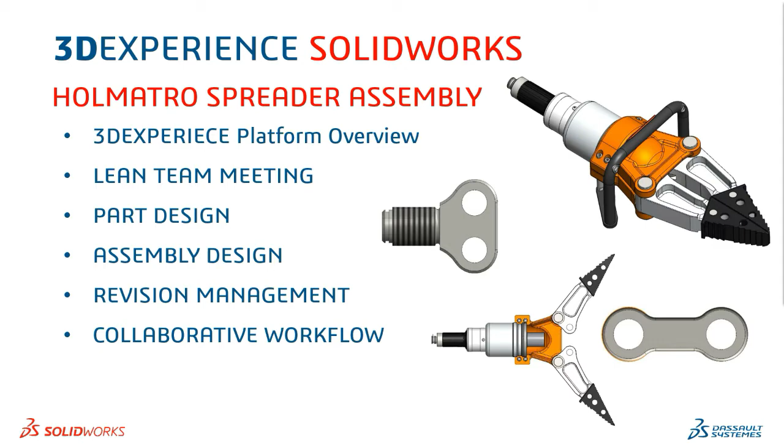So let me just start off with the browser and log in to the platform. I'm in the web browser accessing the 3D Experience platform with my user credentials. Users having credentials will have access to the platform from anywhere, on any device.

So we will see a dashboard with different tabs, widgets, and apps loaded in it. There's a data tab, project, community, and other tabs as well. The dashboard is a fully customizable interface in the 3D Experience platform. We can customize it as per roles, like a managers dashboard, engineers dashboard, or approver dashboard.

So you can see if I switch to the engineers dashboard, I have limited tabs available for access. So we can configure and customize the dashboard as per the roles and requirements.

So users can select the relevant apps and relevant widgets to load in their role within the dashboards.

I'm currently in the HOLMATRO Admin dashboard right now, and let's see the data drive.

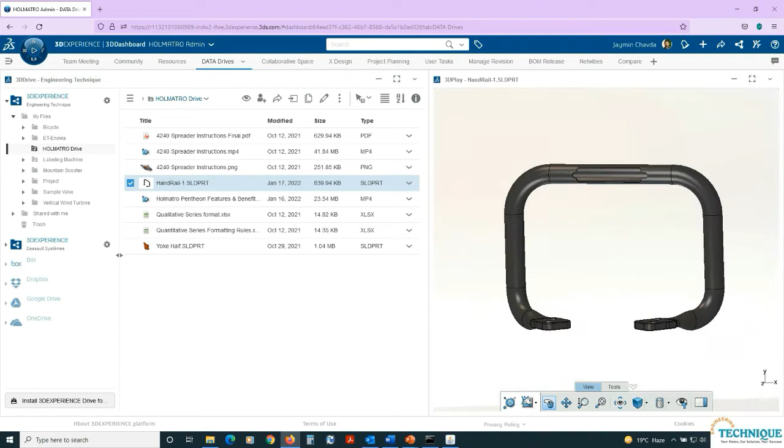So let me just create a new folder over here. You can see the 3D preview of the files. And let us create a folder into the drive.

And just drop some files into it. So the 3D drive provides a secure storage to store any files on the cloud. It's a part of the 3D Experience platform.

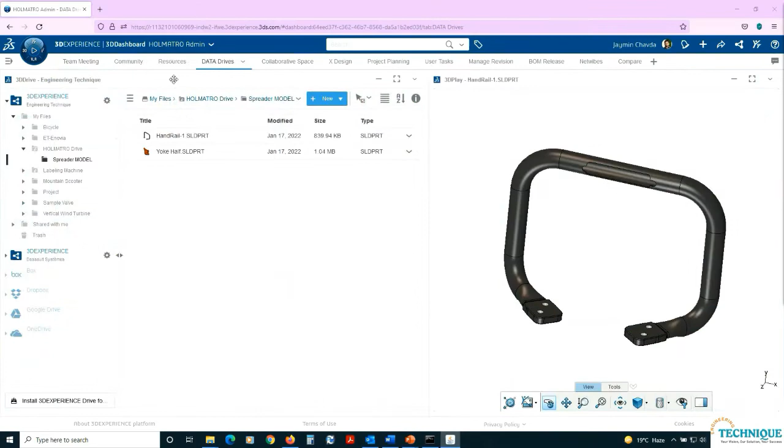Next, in the resource tab, I might want to have access to the SolidWorks blog for the latest updates. So on the left of my screen, in the feed reader, I will get it and it will keep me updated. Next, I have set my SolidWorks web page.

So we can set frequently visited websites, and we can attach data files over here, which can be shown in the form of a bar chart or a pie chart. So all of this is available in the 3D Experience cloud platform.

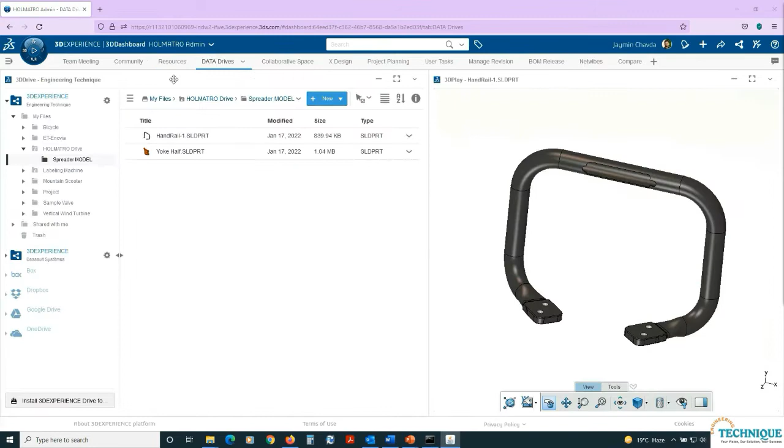Now let's go and create a project folder. In the collaborative space, I'm creating a new project folder named 'HOLMATRO Spreader Design,' giving the same name in the description, setting family to design. I want to store any kind of data over here, and set visibility to private.

So only members of the folder have access to it. We can configure the user access to the project folder. So let me just add Manish and Asutosh, as they are already working on this rescue equipment project.

Now here you can see I have already many other project folders created. So we just need to click on one and we'll have access to the files. You can find 3D models and drawings, and you just need to drag and drop files into the 3D player for the preview.

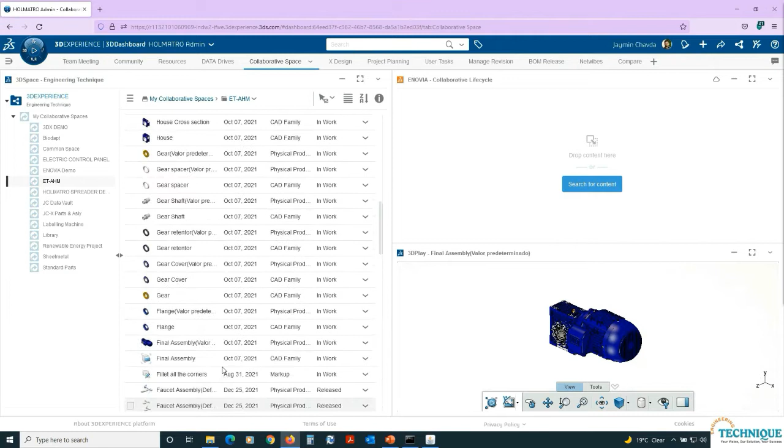I can also drag and drop files into my lifecycle tool, where we can manage the approval processes.

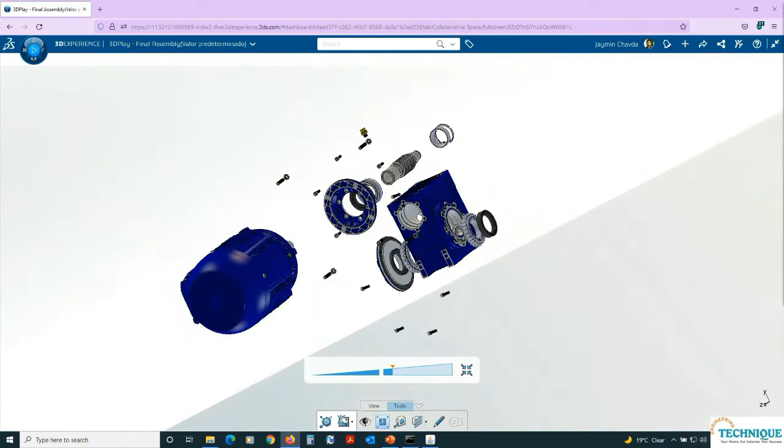So the 3D player is like where you can have a preview of the files. You can have an auto explode view, with auto explode features available for better visibility of internal part details.

We can also cut through the sections of the assembly. So it's just like the eDrawings tool we use in the desktop version, but this is the web-based, cloud-based version of it.

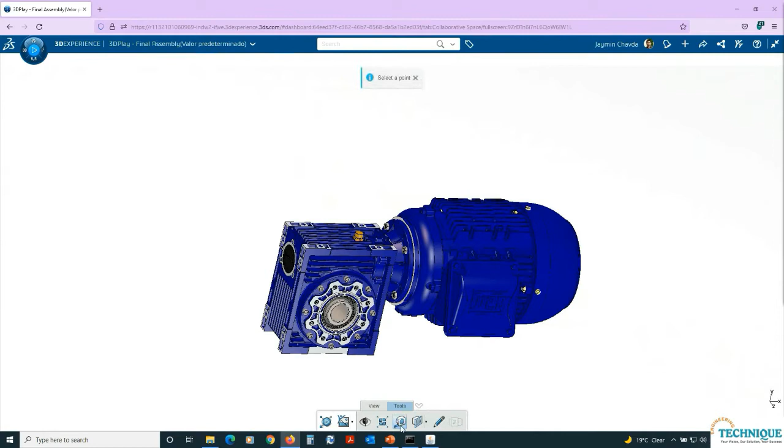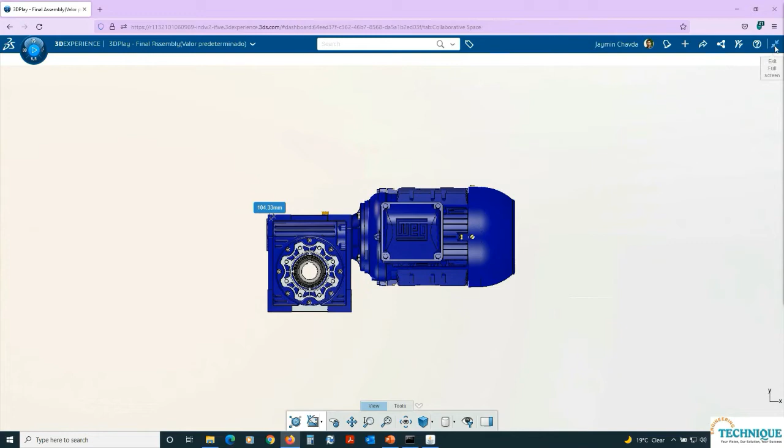There's also a measure tool available for part measuring. It's similar to the functions and features available in eDrawings, now available on the cloud using 3D Play.

Whatever files we save in the collaborative space follow a process workflow. Every file goes through the process - it first comes in work, then goes to release, and accordingly we set the status.

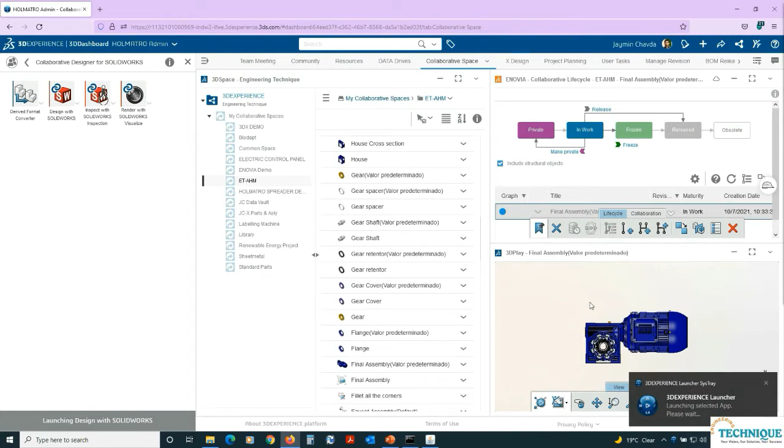Now let me open SolidWorks from the platform to work on the assembly file of the spreader. We're going to work on the spreader assembly - this is a current project on which Manish has already worked, Manish and Ashutosh are working on it.

As we have created a collaborative space for the same, let's open the assembly. It's a rescue tool used by fire departments or emergency service departments. There's a hydraulic actuator and the jaw - those are the functional components of this device.

On the right of the screen, in the 3D Experience add-in, it requires setting the Holmatro Spreader Design at the current collaborative space in my session. So let's set the collaborative space over here.

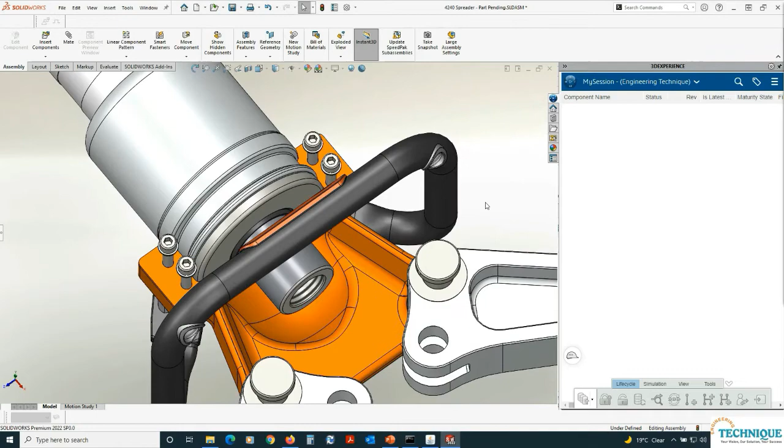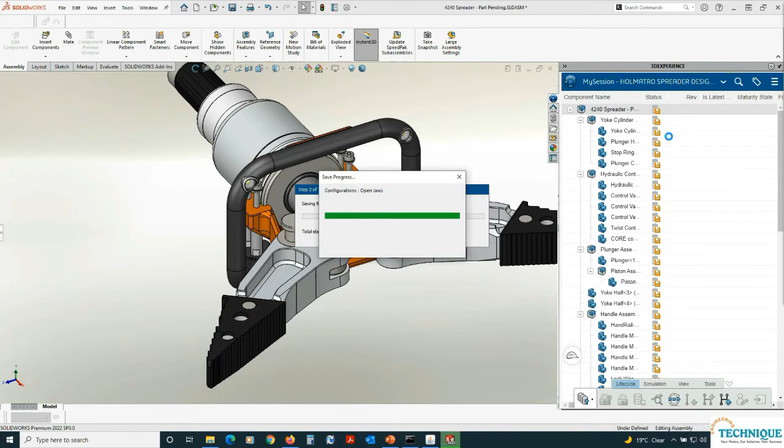You can see it shows the assembly tree having status of files that are not saved in the 3D Experience platform. Let me save all the files on the cloud, which will be uploaded to the Holmatro project folder, showing it is saved to the 3D Experience platform.

It will change the status to 'in work' and the maturity status to revision A1. Let's see how it looks in the browser.

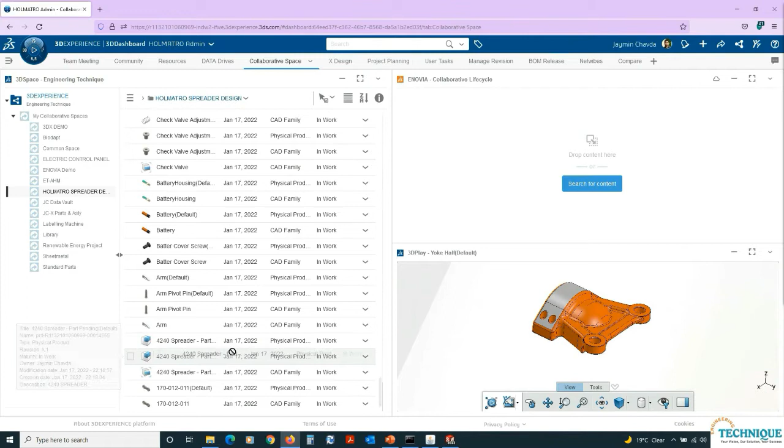You can see in the Holmatro Spreader folder, I will get all the files now uploaded to the cloud. Let's drag and drop files to get a preview of it.

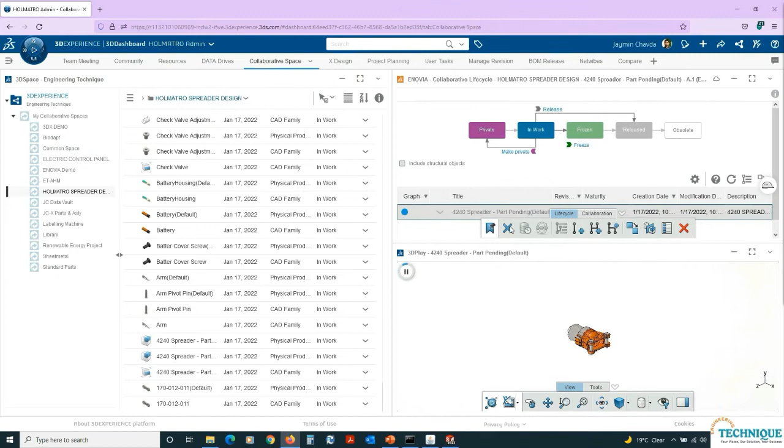Keeping all the references intact, like the assembly, sub-assembly, and part references, it will upload all the files to the cloud.

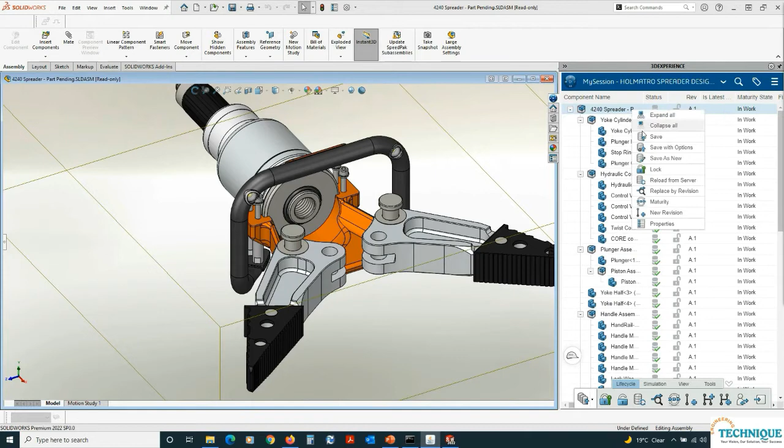Now let us release the assembly. Files in the collaborative space need to follow the process to further increment the revisions, which can be followed by a process workflow.

So all my file statuses have been changed to released, and we can identify the file name, which collaborative space it has been uploaded to, the description, and the part number. All these details can be found in the 3D Experience add-in available in SolidWorks.

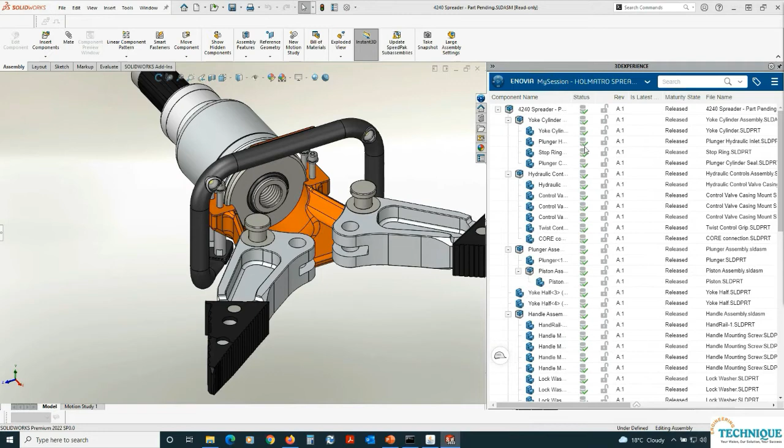Now let's see the bill of material of this assembly in the web browser. In the BOM tab, we can get a detailed bill of material of this assembly.

Just drag and drop. We have a search tool available - you can easily search the files and drag and drop the assembly file to the bill of material tab, and we will get details like revision numbers and maturity states.

We can also see the user who created the files, and the enterprise item number, which we're connecting with the ERP as well as SAP. Currently in this assembly, in total we have around 30 components.

So the assembly is in revision A1.

Let's publish the design for the team review. Whatever designs we have made, like Manish and Ashutosh have made, I'm going to publish this design on the community.

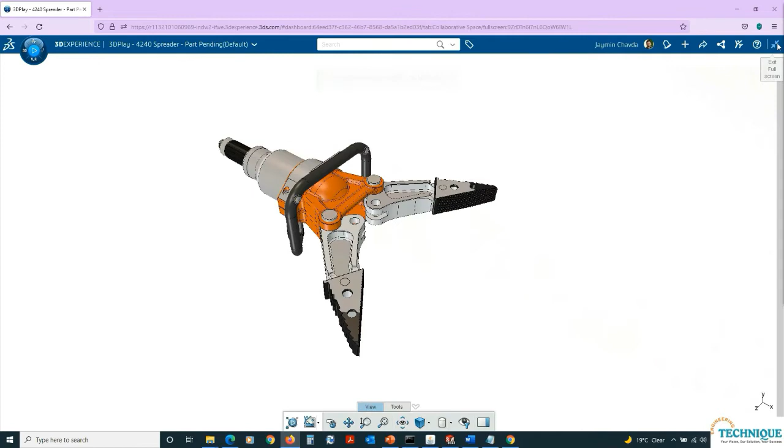You can see currently I'm logged in as Jaymin, and I will ask Manish to do a review. So next I log in as Manish.

Manish is searching for the file 4240 and drags and drops it into the preview window for the design review.

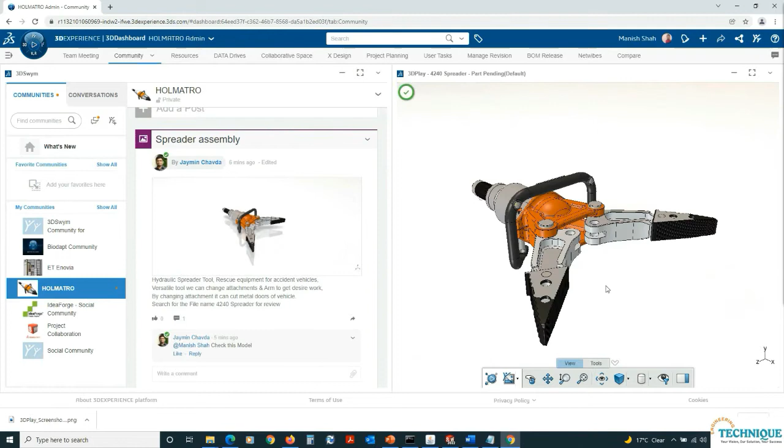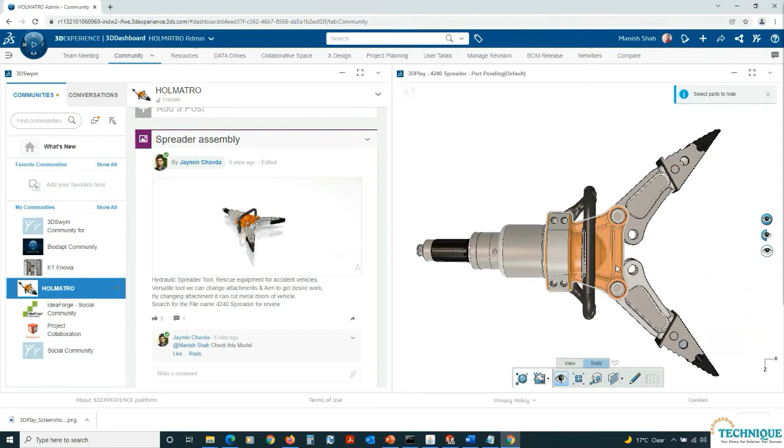He found a few components are pending. Let's hide some components over here - so I just remove the battery, the screws, and the handle part.

Here you can see it requires generating a connecting pin over here with the hydraulic actuator as well as the jaw. Let me add a note specifying that it's required to create a new part to complete the fully functional device.

So let me capture the image again and send it back in a comment to Jaymin, noting that it requires adding the component.

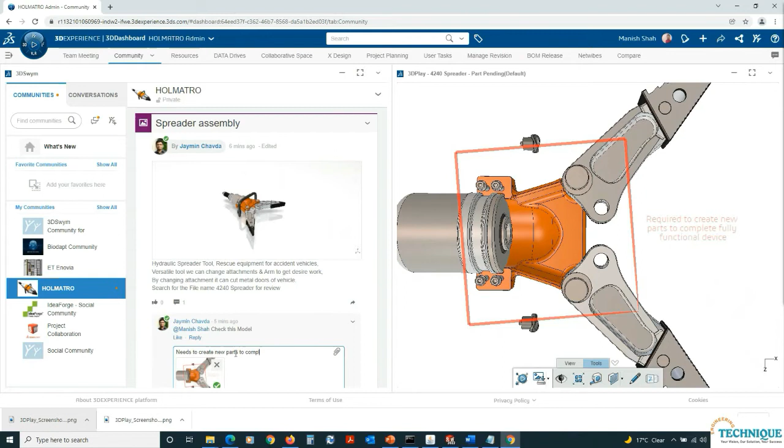I'm attaching the same image saying that we need to create new parts to complete the assembly.

Let's conduct a team meeting - he's asking to create a team meeting for the further action plan and completion of the designs.

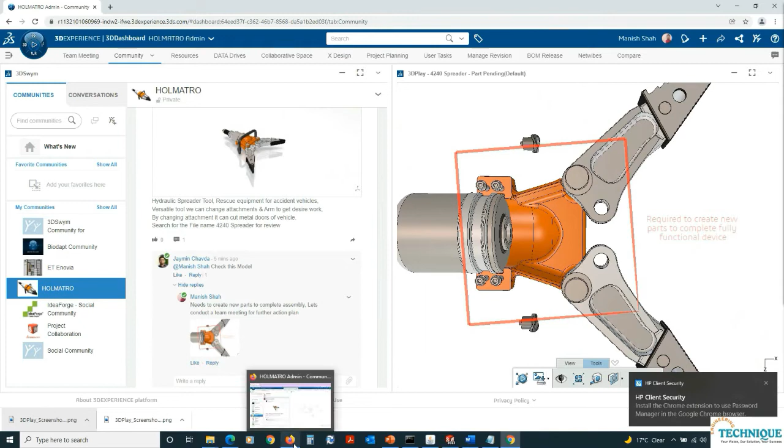So now I will switch over into my login. In my login, I get a notification from Manish saying he has checked this model and wants to conduct a team meeting.

So now I'm in my team meeting tab, having widgets of 3D Lean. There's already a team created, so let's see the design team. Different lean gates are available. This tool is useful for shop floor meetings.

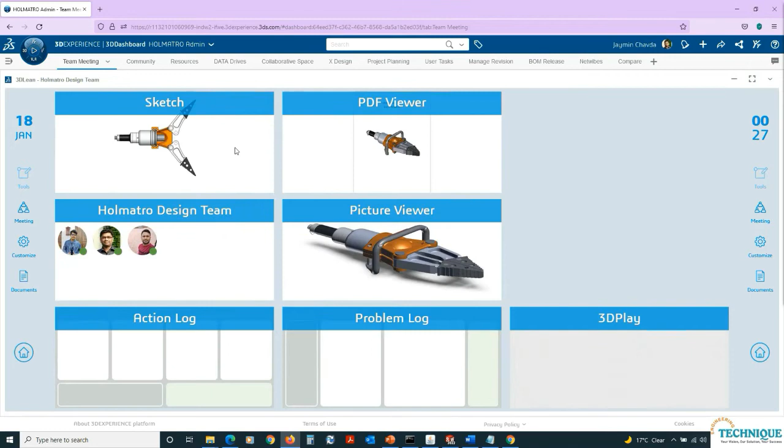So whatever content Asutosh and Manish have created has been uploaded over here, including a few training manuals.

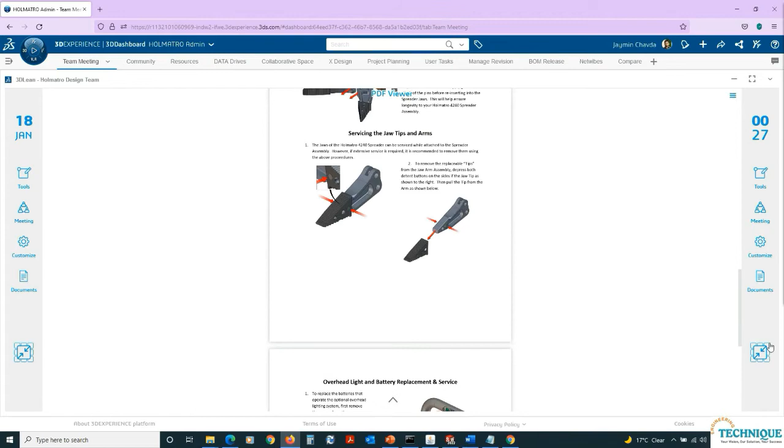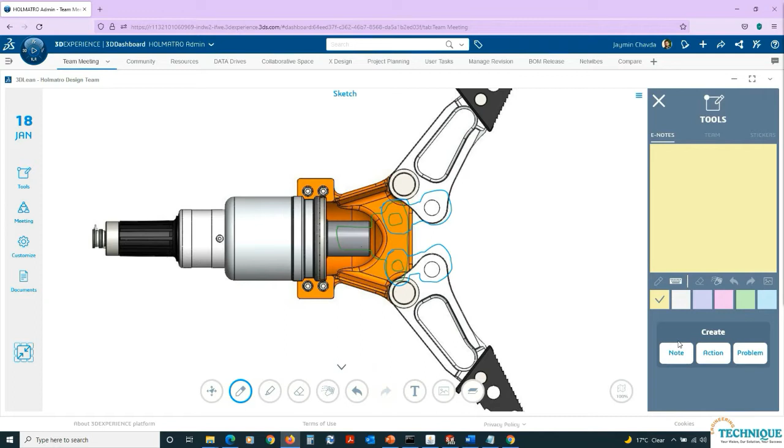Also here I can specify and get notes from the teammates as well. So 3DLean is also helpful to capture meeting notes and comments from users in the form of action logs or problem logs.

So actions need to be taken: designing a rod end to complete the product design, and second, creating a link component using the XDesign.

And after that, we need to complete the assembly model by adding all those components. Also want to capture some of the problems for the rescue equipment.

So I'm now changing the sticker color. The yellow will be highlighted as an action log, and the pink will be highlighted as problem logs.

So design should be robust for the rescue equipment. Minimal power usage will be focused on for the design, and the product should be lightweight since it is a handheld device.

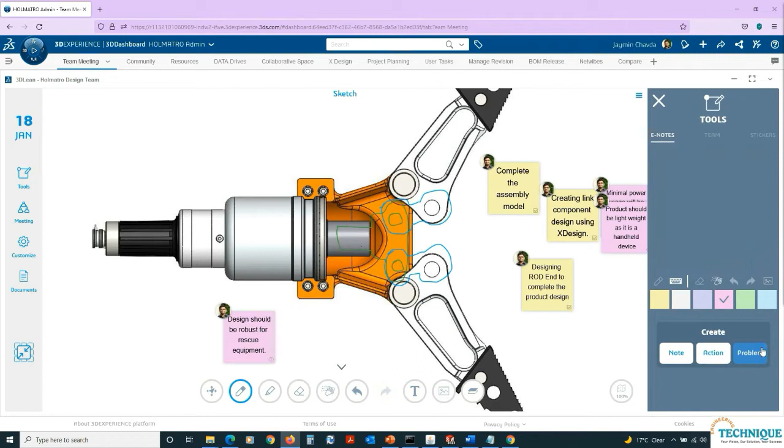So whatever problems and action logs we have captured during the team meetings can be converted into a task.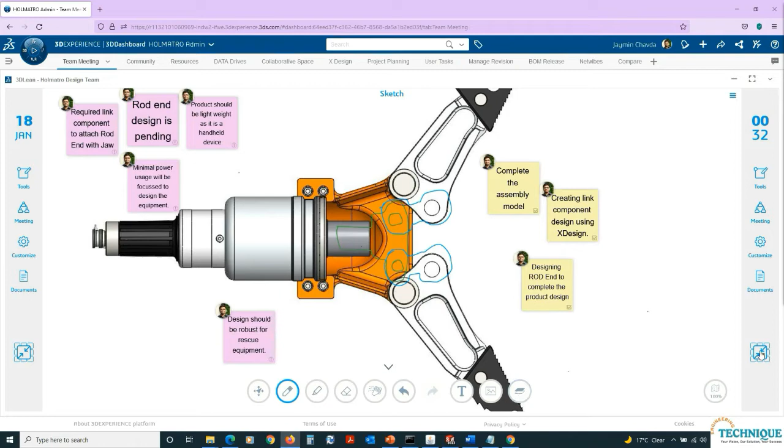Let me go to the action log, and now I will determine which actions should be taken on a priority basis. So designing the rod end and the X design I will prioritize as today's task, and the assembly modeling completion will be done within the week.

So let's generate the task based on the action log. It will automatically generate the task for the user, the task owner, and the task assignee.

So with 3D Lean, we can capture the necessary points discussed in meetings and share them with team members, so all users get updated with the latest status of the project.

So you can see the task has been generated over here in the name of creating the link, as well as designing the rod end to complete the product design. Also have file attachments, description, and titles.

We can set the priorities, we can set the timelines and dates for when we've planned the start and end of the plan. You can set the assignees over here.

So what I'll do now is create another task individually to show you how it will work.

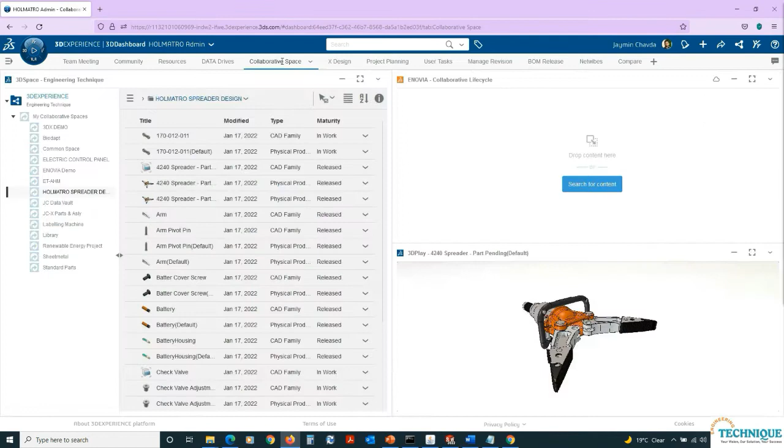So now I'm going to create and generate the task in the name of designing the rod end for the spreader assembly, giving the description of designing a rod end for the spreader assembly.

Setting the priority to high, and this task I am going to assign to Asutosh. So Asutosh is going to work on this part creation; he is going to model this rod end part.

Low, medium, urgent, high - these are the priorities you can set as per the requirement. So I will set it as a high priority task, and I'm going to attach the files.

I'm just specifying the file name, and it will add the file as an attachment over here. So let's just save this task.

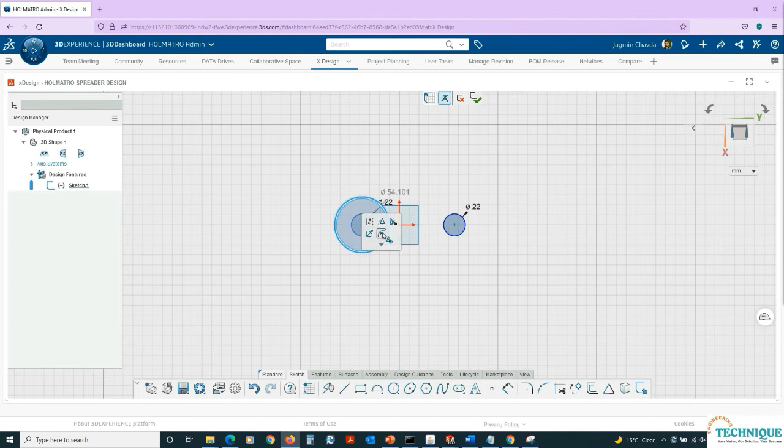So XDesign is actually a browser-based design tool. You can see here we have sketch tools, solid modeling tools, and feature tabs, same as SolidWorks. So I'm just creating a sketch using shortcuts, same shortcuts used in SolidWorks can be utilized here in XDesign, creating a circle geometry, giving dimensions of 39.

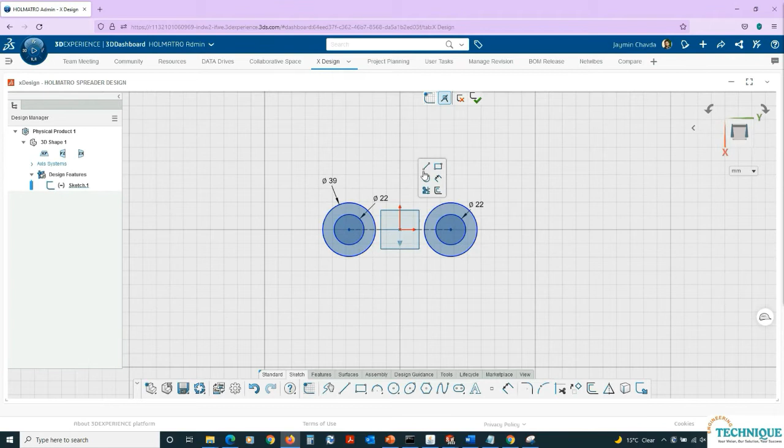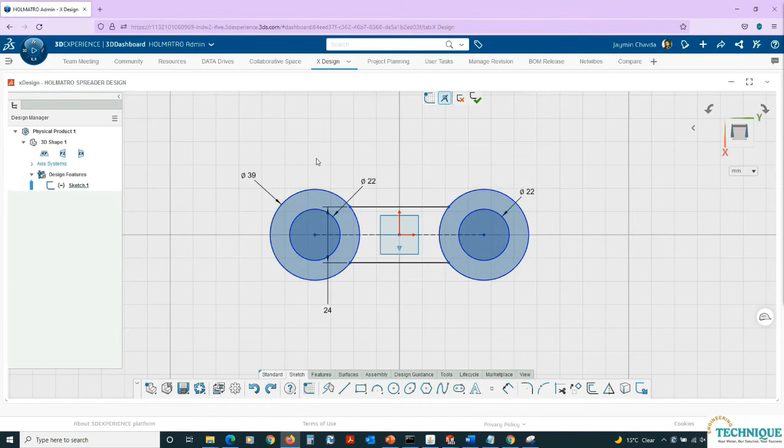Let me just again create the connection point between two centers. This is the construction line, I just want to make it the center geometry. So let's complete the sketch, adding the relations and giving the dimensions to complete it. It's really easy, we can utilize this browser-based XDesign tool to design 3D models and 3D components, giving a dimension of 45.5.

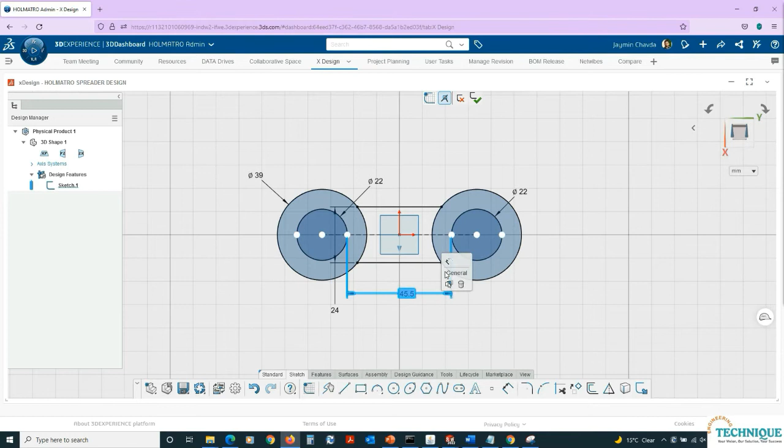So this is what I have just completed, the sketch, and let me just generate the volume. I'm selecting the sketch and it will automatically generate the volume. It's completely a browser-based application where we can design the component, giving a thickness of 15 mm.

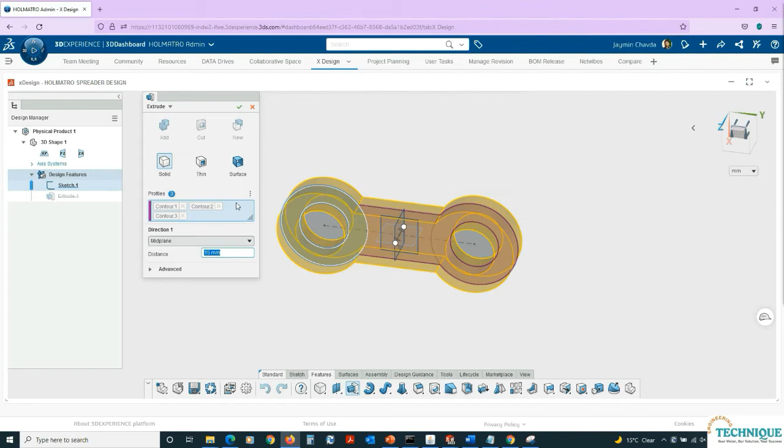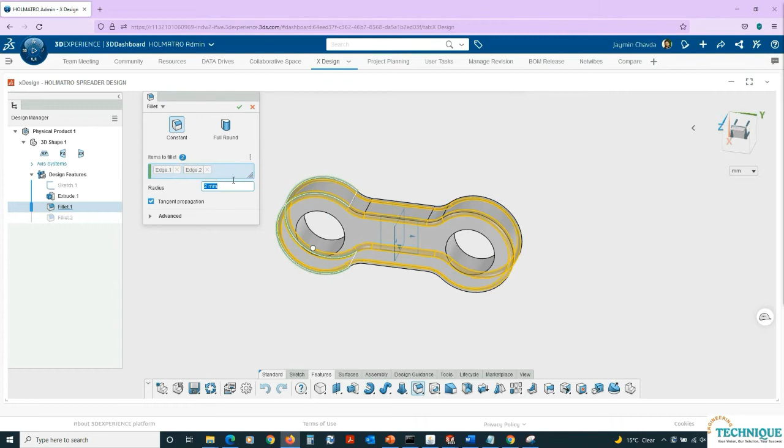Adding a fillet to remove the sharp edges, it will also pop up with fillet suggestions, automatically pick and select the multiple edges. Let's remove the sharp edges on the face front side with 2 mm, and save the component. That can be directly saved on the cloud itself.

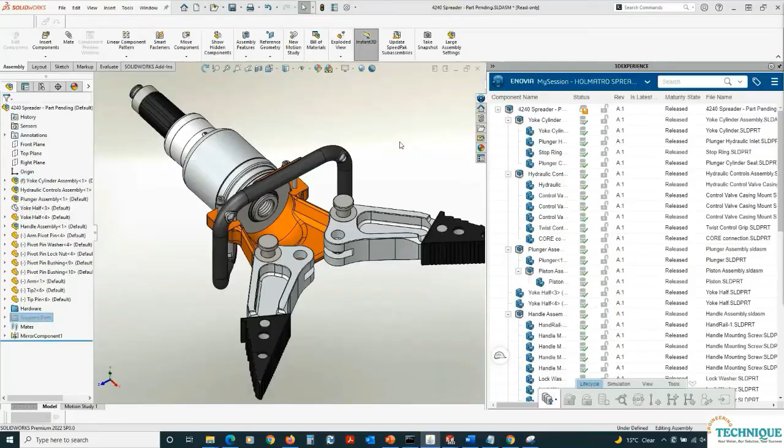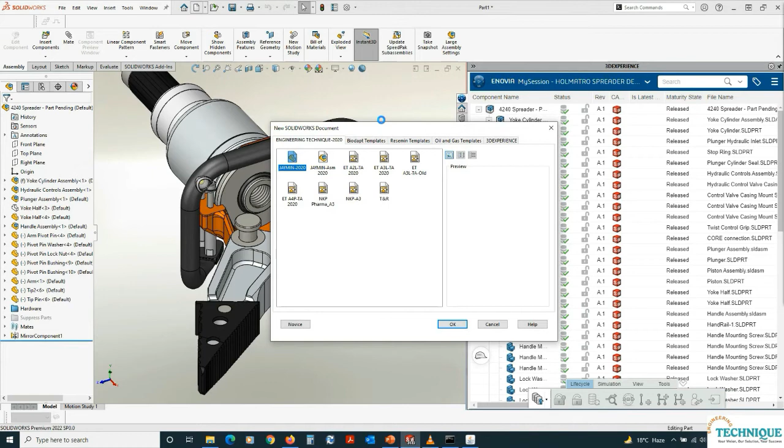So next, Asutosh is going to create a part model in SolidWorks. He is getting notifications to complete the task for the rod end component, and he also gets the assembly file in the attachment to work on. So just drag and drop those files from the browser itself directly into SolidWorks.

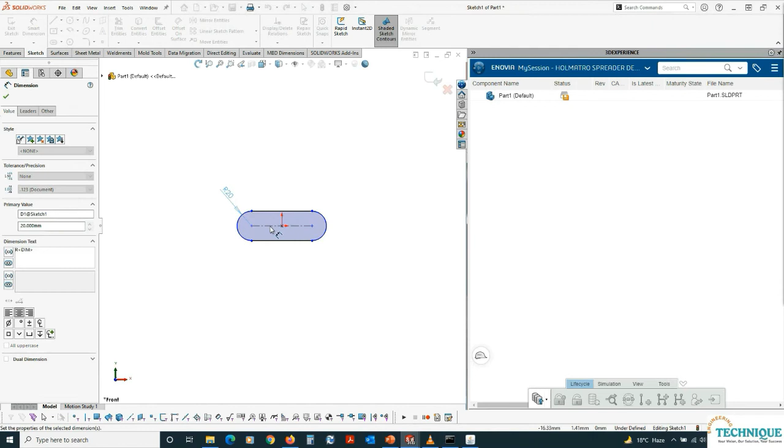Creating a new component, creating a sketch as suggested in the team meeting sketch, giving the dimension of 20 mm of the radius, 50 mm of the center distance. Again creating a few sketches using shortcut tools, we can easily generate the geometry.

And you can see I am currently working in SolidWorks to generate the geometry, and that assembly I have opened directly from the 3DEXPERIENCE by using drag and drop functions and features. So I'm completing the sketch, and now let's generate the volume, having a thickness of 40 mm.

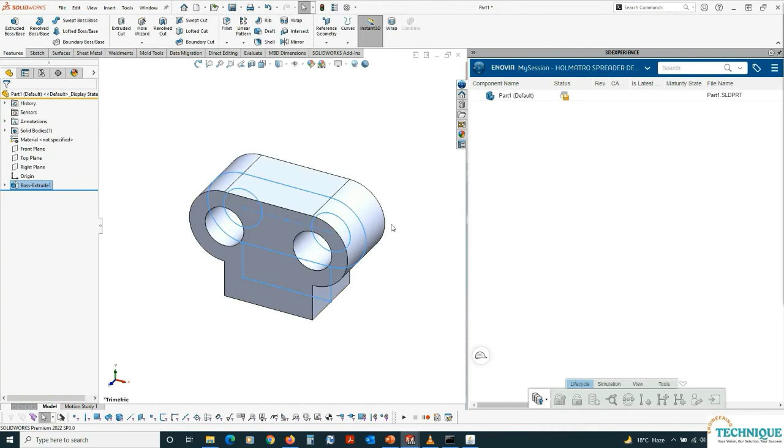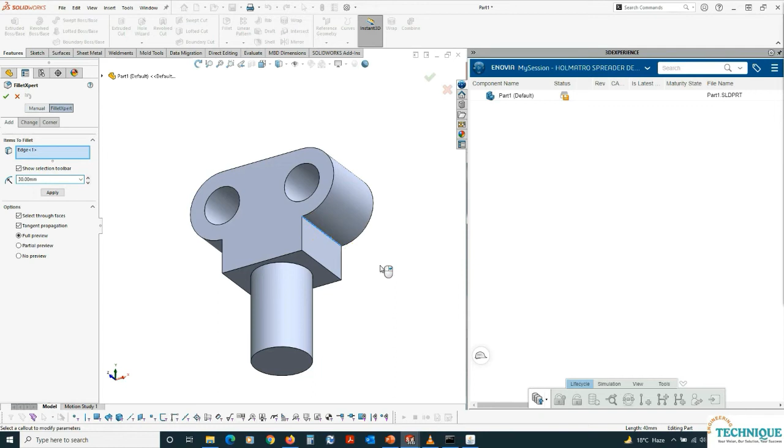Let me just complete this part model by adding a threaded shaft on the bottom face, 33 mm of the diameter and 50 mm of the length. It's actually a threaded shaft, so it also requires the undercut, and let's remove the sharp corners. I'm giving fillets over here of 30 mm.

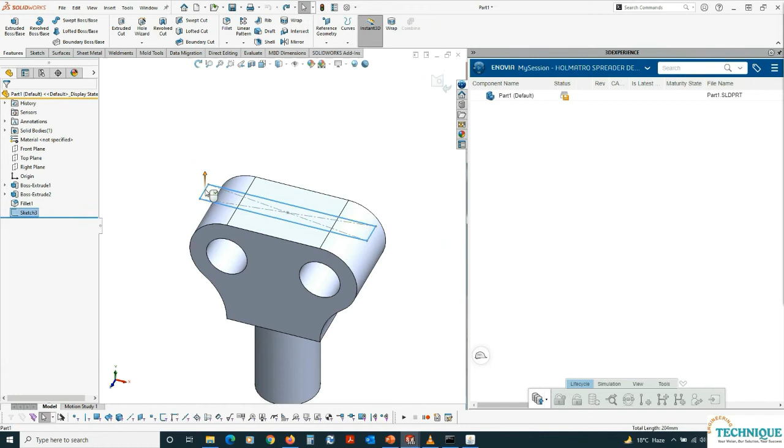So let's just complete the part model by removing some material. Okay, so now let me also just add...

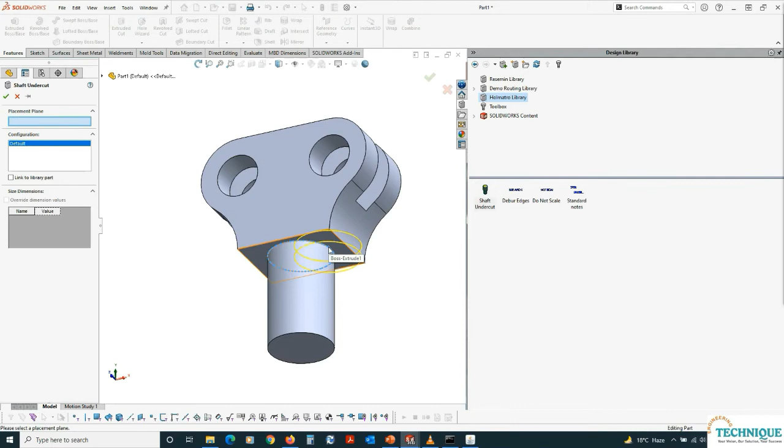So it's a threaded shaft, that's why it requires the undercut. Let me just add the predefined features here, the undercut feature, which is required, adding 4 mm of size. I will change the size as per the requirement, and let me add the thread, cosmetic thread, over here.

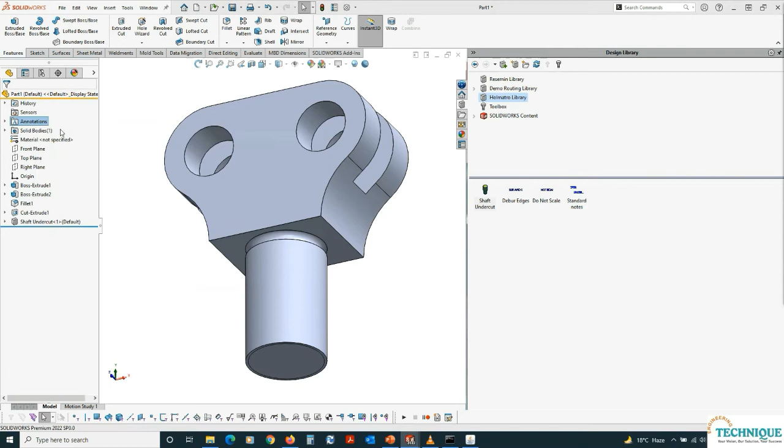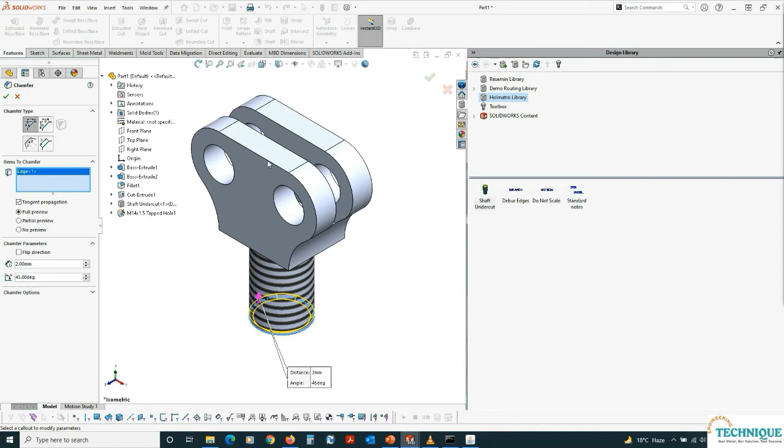Okay, so it also requires removing the sharp corners, as well as adding tapped threaded holes on the bottom face of the component. Let's remove the sharp corners using a chamfer of 2 mm size. So it's easy to generate this kind of component, and let's apply the material and save this component to the cloud.

So first of all, it is going to be saved locally on my drive. So let us just complete the drawing part as well. I'm also going to create the drawing for this component.

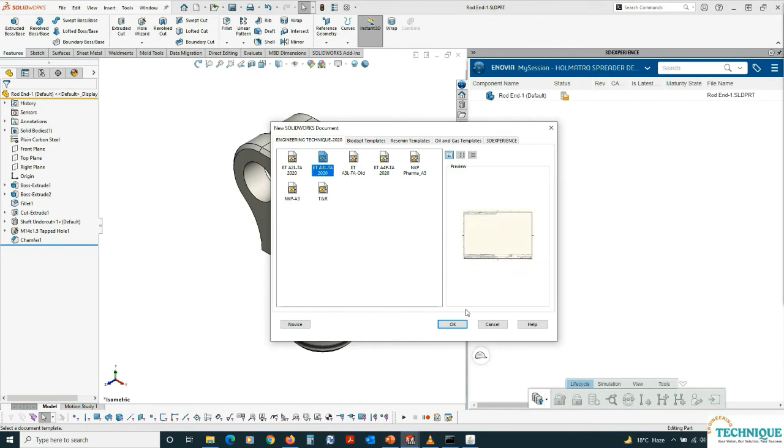So I'm saving this component in the name of rod end one, and also let me just make a drawing. It will automatically populate all three views as well as the isometric view, just like this. Let me just add the dimensions to complete this drawing.

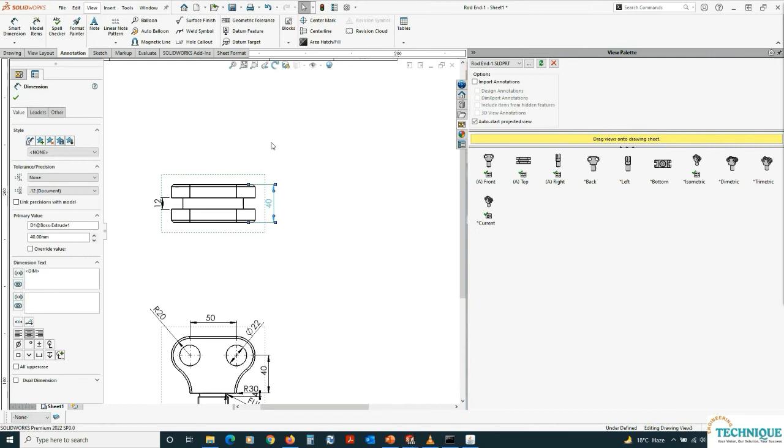Just clean up some dimensions, set alignments and arrangement. Okay, so now I'm going to save this drawing file as well as my model file.

Both I'm going to save onto the cloud. So currently you can see it has not applied any status, and the revision number is not there. So now I'm going to save these components on the drive, and it will come up with the status of in work.

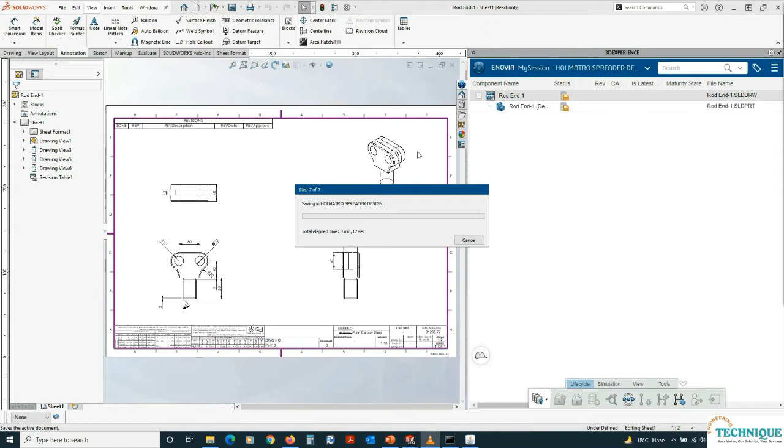Yeah, so you can see it has come up with the revision A1, as well as the maturity state shown as in work.

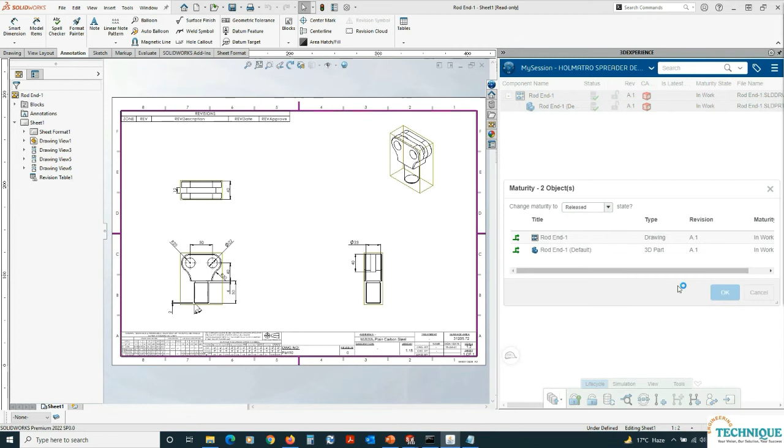So now let's complete the assembly. I'm going to send this component to the release, so both my parts are going to be sent for release. Then I need to add this component into the assembly as well.

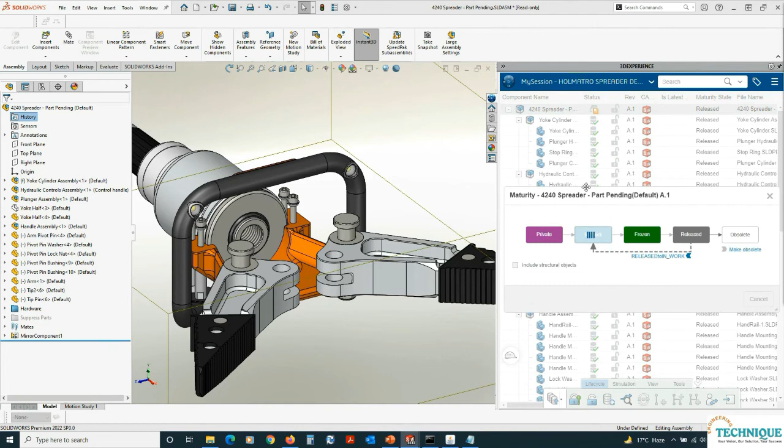So right now we are in the assembly file wherein I need to add the components. So let me just change the maturity status of the assembly, as I'm going to add a few components over here.

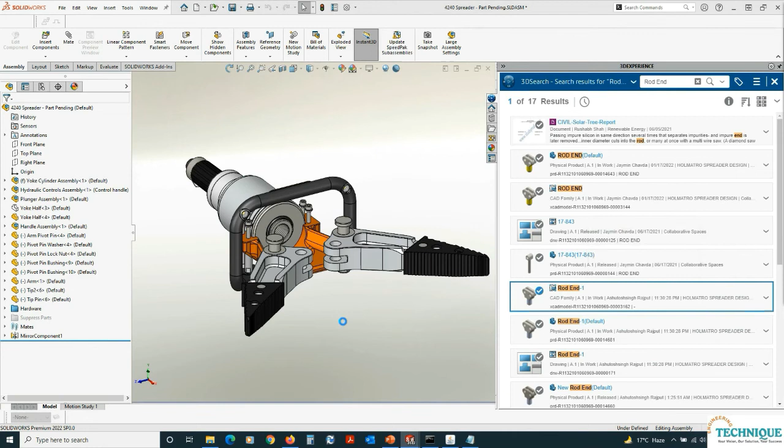So let me search for the rod end what we have just created. There's a really quick search tool available inside the 3D Experience platform add-in. We have a quick search available, so using that we can easily find the components, and you just need to drag and drop the part.

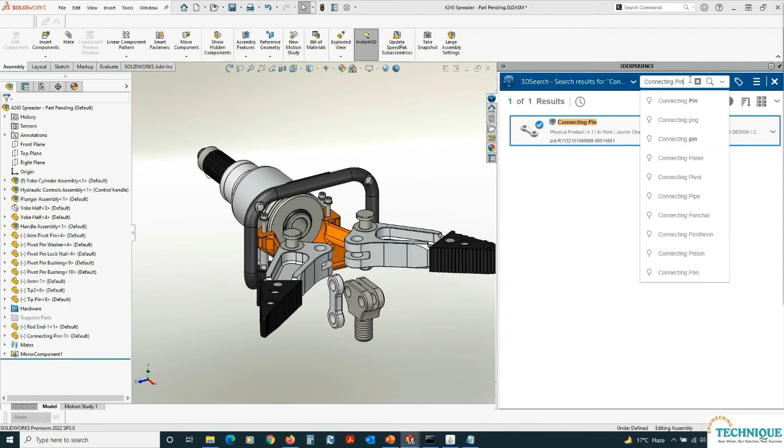Also, let me bring down the other components like the connecting pin and connecting link, what we have designed. Yes, so again just drag and drop from the window. Few other components like the pivot pins also need to be added over here. So let me just complete the assembly by adding some relations and mates.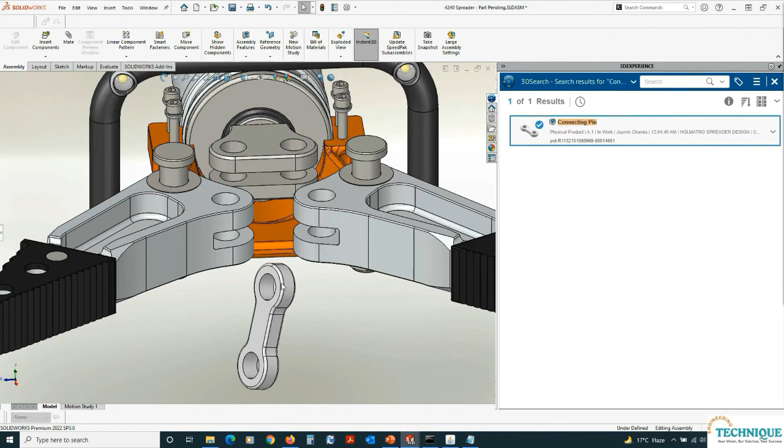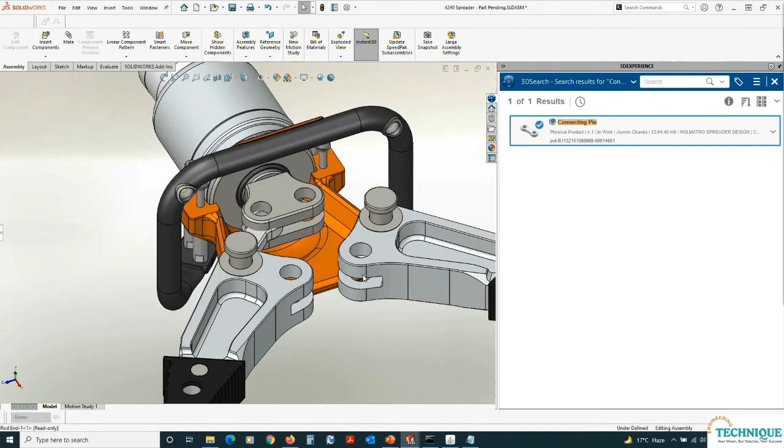So let me just set this component into the center geometry from here. So easily we can add the components and feature mates relations to the part.

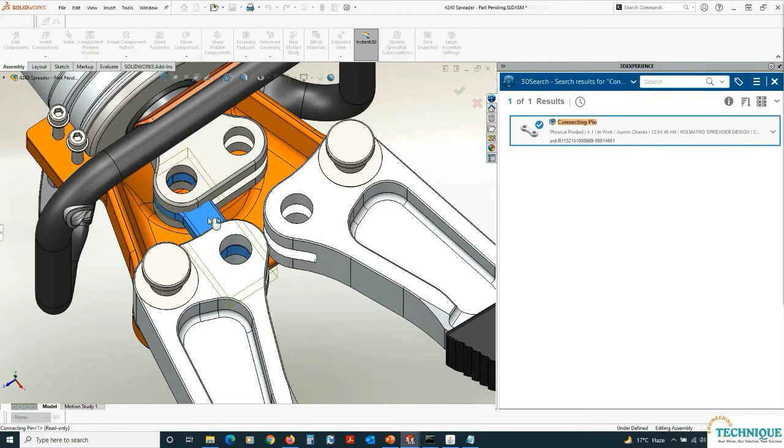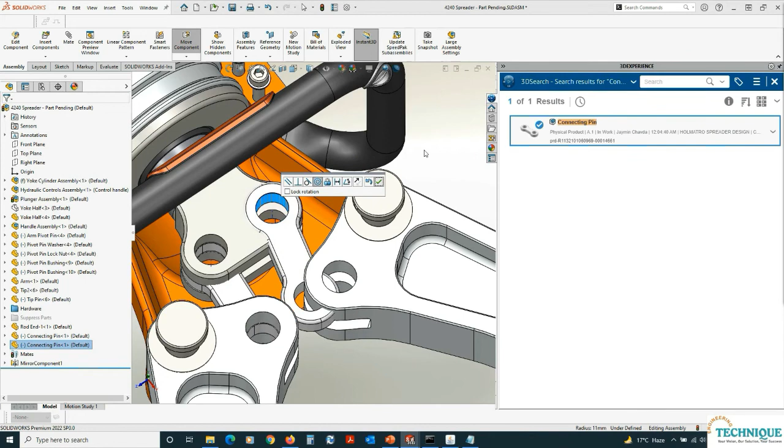Let me again just copy the second component on the opposite end. Just drag and drop. Applying a smart mate, it will automatically match the two holes by concentric mate. Again adding the same.

So let's call the remaining components like the pin, the pivot pins, what is required to complete this assembly file over here, having a size of 22 mm diameter and length around 50 mm.

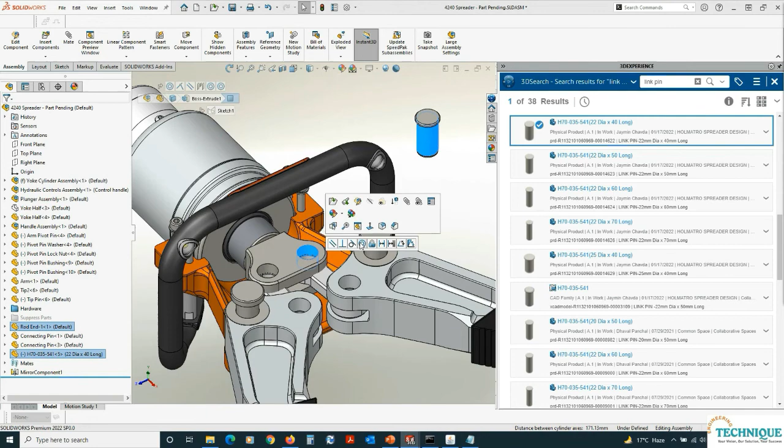So what it shows over here is a single file but having multiple configurations. 3D Experience easily identifies all the configurations and will show you all of those configurations in the list, so you can easily get a configuration-specific file directly from the drag and drop window.

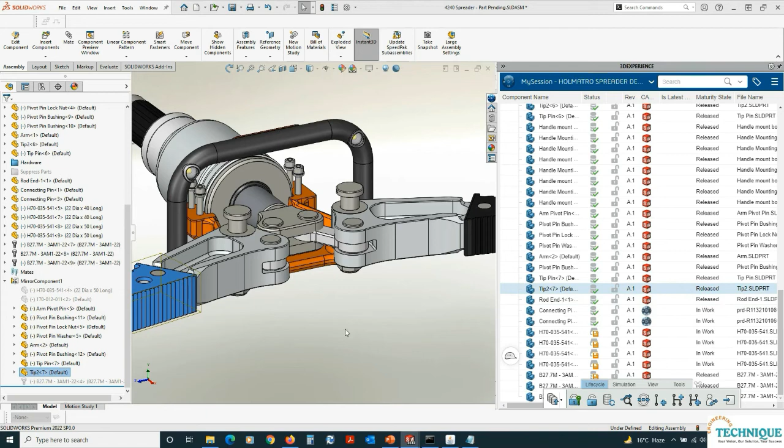Okay, so again I have just added a few more components. What I want to highlight here is you can see there is a symbol of SolidWorks, and the connecting pin has a symbol of 3D Experience. So it will bifurcate and give the identification of what part we have created in SolidWorks and what part we have created in 3D Experience. The part created in xDesign is highlighted with a 3D Experience symbol, and the part we created in SolidWorks is highlighted with the SolidWorks symbol.

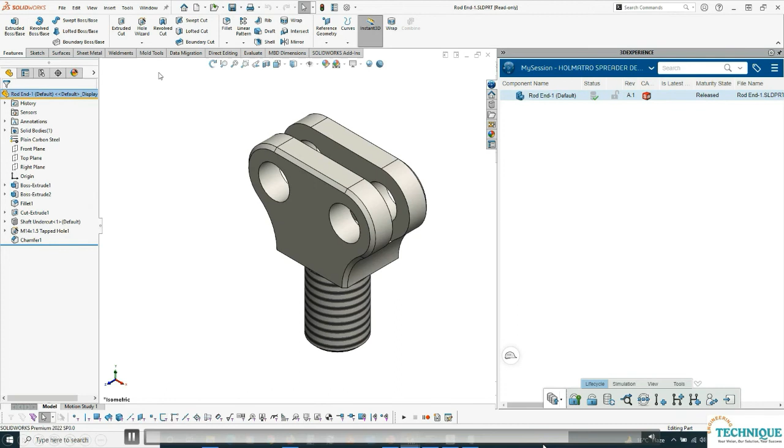So right now in this component, it is actually fouling with the pin. The pin has a thickness of 15 mm and this slot size is around 12 mm. So what I'll do is change the size from 12 to 15.

Let me just update the drawing. So the drawing has been updated, and the model is also going to be updated, but the file has a revision of A1 and is currently in the release state. So let me again generate a new revision for the same file.

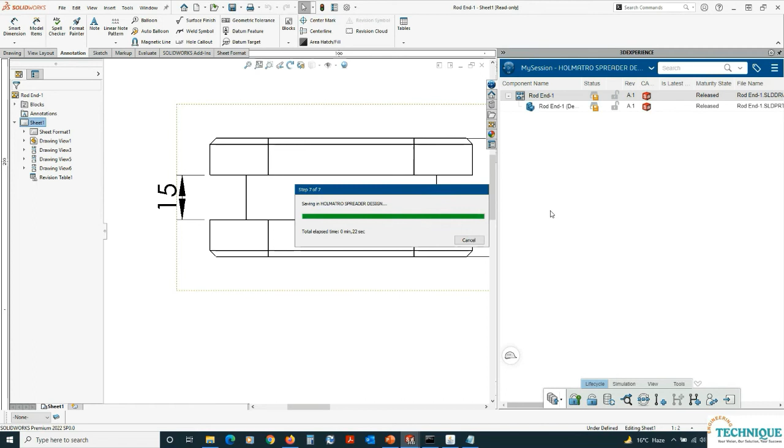So I'll select new revision, and what it does is generate revision B1 for this rod end one component. It will automatically increase the revision number over here and set the maturity state back to in-work. So earlier my file was shown with a release status; now it will show as an in-work status.

Again the same, we have added a few components over here, like the connecting pin as well as the rod end, and the other circlips and pins. So that's why we also need to revise the main assembly file.

Okay, so I will just select the main assembly file and revise it. Currently it has revision A1, and I'll send these files to revision. So it will automatically increment the revision number to the next number.

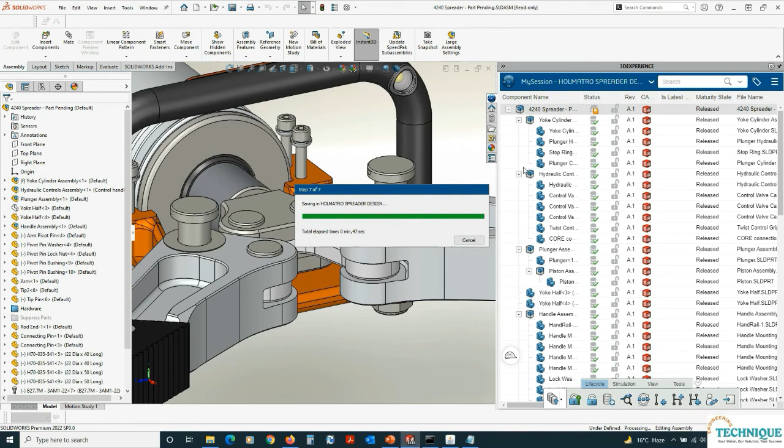Okay, so this is how we can manage revisions, which can automatically update with the change of state, change of maturity states.

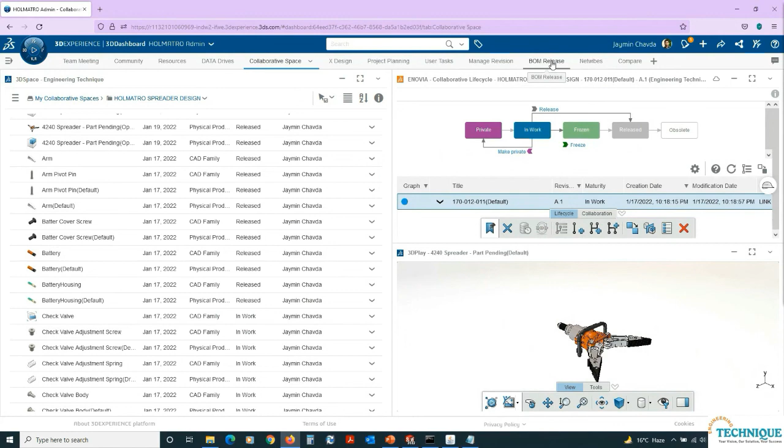So now let's just compare the bill of material differences between revision A1 and revision B1 — what differences are there, like the components we have just added. We can also compare the bill of material in the 3D Experience platform.

So on the left you can see I have A1, and on the right I'll set B1 to compare with. So I'm just going to hit compare, and it shows me the differences, like the number of components we have added over here.

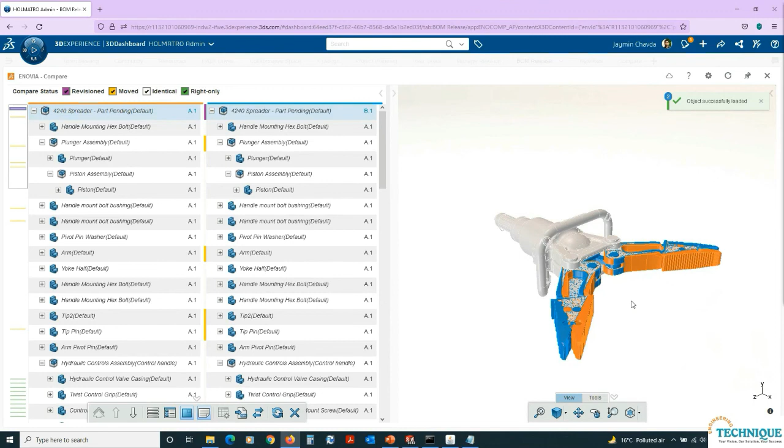It will also highlight the parts with color coding — the revised components, the moved components, and only the components that are there in revision B1. You can see it's highlighted with a green color mark.

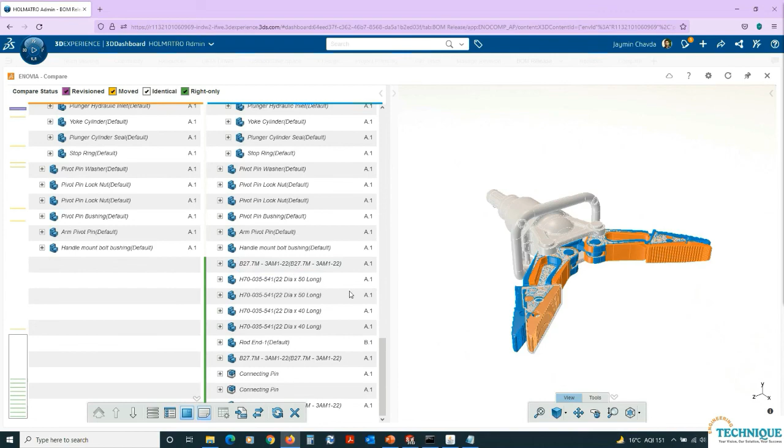Okay, so this way we can easily create and manage the assemblies, the designs, the part models. So the 3D Experience SolidWorks also offers some big advantages over traditional SolidWorks, like when it comes to deployment, which can dramatically reduce your IT overheads and complexity.

So SolidWorks will directly install from the 3D Experience platform — you just simply need to click on the apps. It always stays at the latest version, and it will automatically push critical errors and fixes. So it's actually completely browser-based, easy to integrate, with secure cloud backup and storage.

So with 3D Experience SolidWorks, you also get data management — inbuilt data management. So we have also seen that as well.